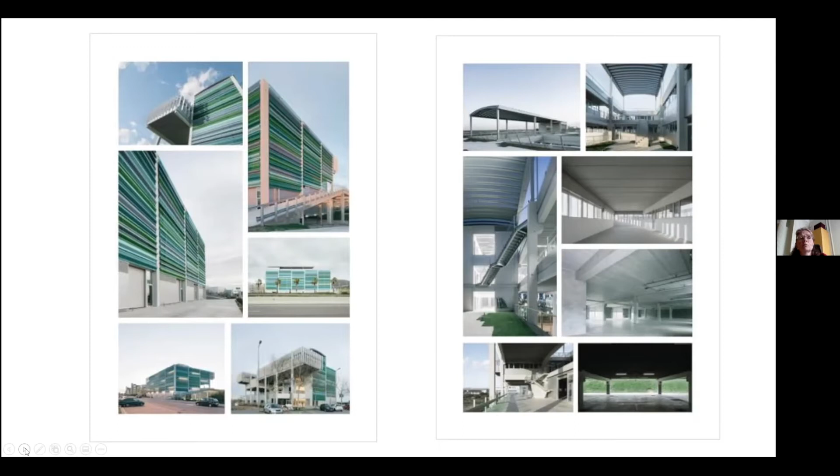Why are we here today talking about circular economy? Simple answer: because most of the present economic systems worldwide are linear. Linear means that waste is part of the process, and the reason we are in this position is because the Industrial Revolution, 2 centuries ago, was linear instead of circular.

The linear economy was pretending to increase production, and the industrial model was designed by engineers. In my own point of view, it is based on 3 points that have caused a lot of trouble for the development of the linear system.

One is the assumption that raw materials were unlimited, and that's not true. Another is that the consumption capacity of people is infinite, and that is not true. And another thing is that the model assumes there are no environmental constraints. This is what we see - that it could not be that way.

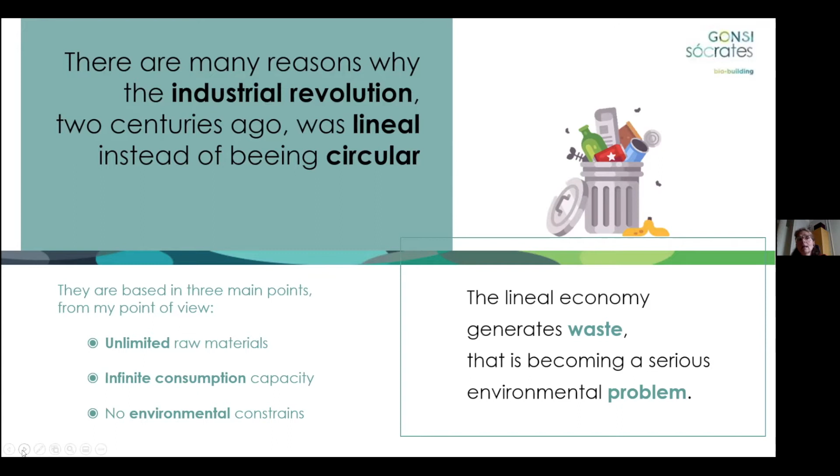Our experience in this building, the bio building Gonsi Socrates. Gonsi is a real estate commercial asset developer and manager. According to our corporate social responsibility, we have built the commercial bio building Socrates in Viladecans, Barcelona, under the circular economy paradigm. What are the key points of this development?

One is the construction system. The construction system was pre-industrialized and pre-manufactured, with pre-industrialized and pre-manufactured solutions assembled on site instead of amalgamated. That's a key point to make the circular process happen.

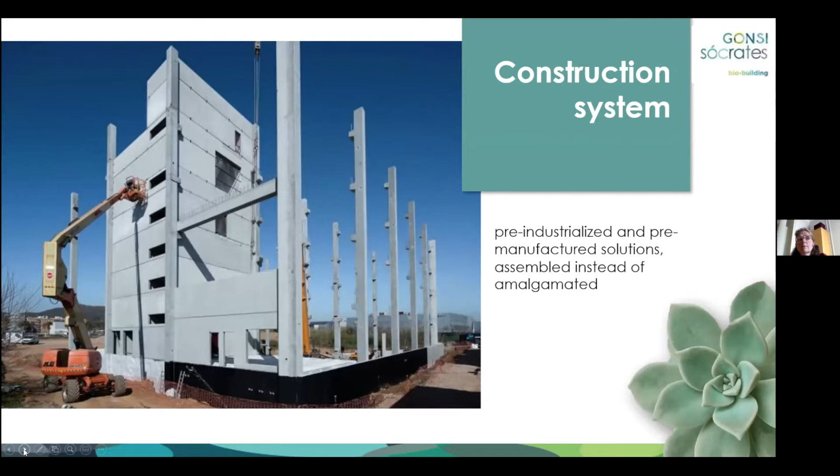Another thing is how we ordered the relationship between persons, between all the integrants of the contract of the work. The relationship between partners has been through an integrated project delivery contract, known as an IPD, between the architect, the constructor, and the developer.

Another thing is that we have been using technology as an ally. I mean, we have done our best with that, because in our sector, from a technological point of view, at least in Spain, it's not at a very high level.

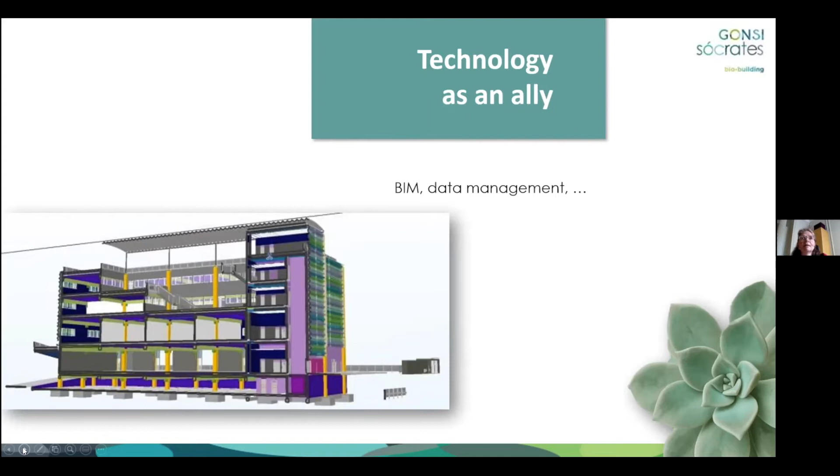Another key point for me is that whenever we planned it, when the architects designed it, and when we decided to build this building, we were always looking at the life cycle of the building. That includes the maintenance period and the construction of the building. This building has a deconstruction planning.

One thing that's framed in the IPD is that we need to manage the talent. So the project has involved talent management, applying, for example, techniques of people management in high performance teams.

After the experience, and when you invited me to this talk, I did a SWOT analysis, trying to share with you the strengths, the weaknesses, the opportunities, and the threats that the experience of building under circular economy criteria has brought.

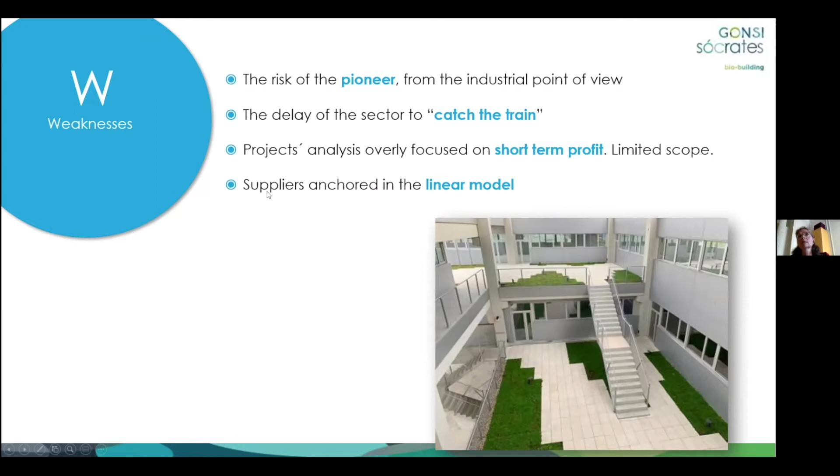And another weakness is that suppliers are still anchored in a linear model.

The opportunities that this new concept brings: building while considering the lifetime of the building could reduce future investments and expenses in the building. An opportunity is to be able to close the economic cycle by capturing value at the demolition or rehabilitation stage. I mean, circular economy, it's an economy, it should be considered from an economic point of view.

Another opportunity could be to develop the sector according to the present. As I've told you before, our sector, at least what I know here in Spain, is a bit stuck in the last century, the 20th century, not the 21st. And that opportunity is an opportunity to make the project more visible.

That's why we are here, talking to you. And the threats - for me, an important threat is how the political system supports and collaborates to accompany this economic revolution, because the circular economy is a revolution from my own point of view.

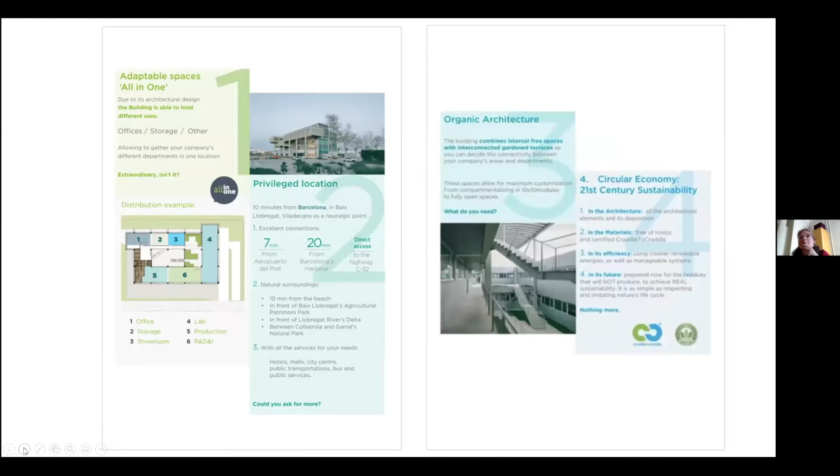This is a bit of a briefing on the characteristics of the building, in the city close to Barcelona, Viladecans, and you can see here a bit how we describe it from a client point of view. Thank you very much for your attention. And I think Ignasi will take over the view.

Thank you, Inmaculada. That was a very powerful message. And I say visibility is so important, isn't it? That's why you're here, that's why I searched for you and found you. Just as a client, could I ask one question of you?

Yes. When you go about selecting your preferred architect, engineer, contractor, how important is circular economy to your business, and to what extent do you require these companies to think circular?

That has been a key point when we built the team, because we share this purpose - it was around the circular economy, and that is not small. Pich Architects has had a tradition of sustainability; we were his clients for a long time. The constructor - this was our first experience with the constructor, but the constructor's strategic vision was also the circular economy. So it was a key point to make it work. In our social responsibility, the company holds the value of sustainability.

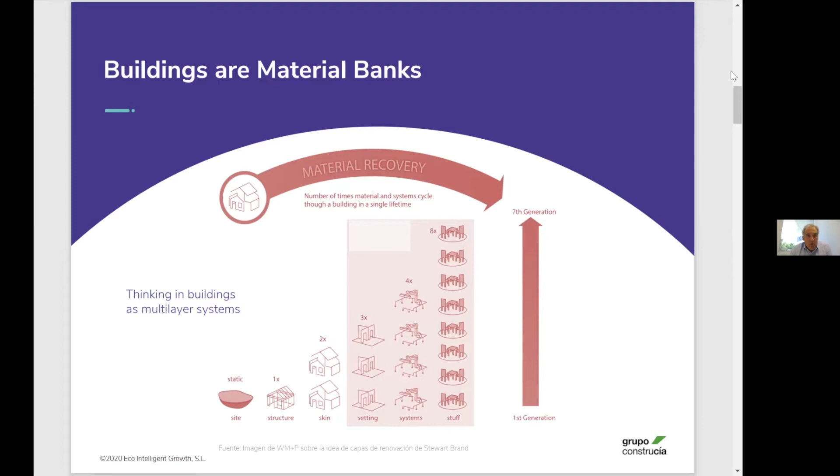Inma has mentioned it already, but we were very much at the ramp up of the circular economy definition. We were supporting the Ellen MacArthur Foundation, indeed supporting Dame Ellen MacArthur at the very beginning when she was visiting us in the Netherlands.

From the very beginning, we said that a circular economy, as Inma just mentioned, is not a sustainability topic, it's more like an economical, socio-economical topic. So I don't consider sustainability a journey, sustainability is a goal. What we need is an enabler to achieve sustainability in any kind of human activities. And me being a biologist by education, we are used to dealing with complex systems. So the built environment is a complex system, but not just because of the technical things.

Just a comment on the chat saying that it's more a cultural challenge than a technical challenge, and I fully agree with that. I think the main challenge for circular economy is cultural, because circular economy is a new relationship framework that has to be built up, and this is what is really challenging about a circular economy.

That's one of the reasons why we started by pushing all the suppliers, most of them, we were pushing all of them, but not all of them took it. But in order to have what we consider at that time probably the first and only way of verifying circularity at product level, which was through the cradle-to-cradle certification program, we started by taking the project and benchmarking the different products and different material selection with the cradle-to-cradle strategy. We developed a number of products. There were some products developed on purpose for this project, and there are now new products being adopted by the manufacturing companies themselves.

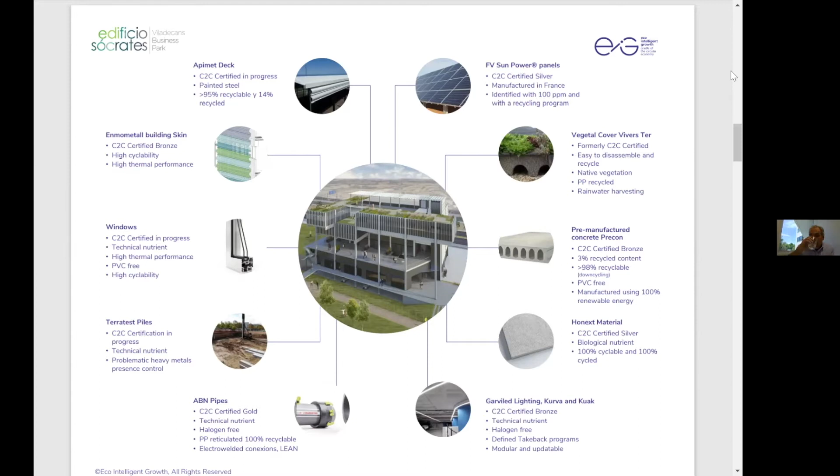The cornerstone of our strategy in circular buildings, in circular real estate, is how we create value through circular building. The main thing about value creation is, okay, what is waste? How do we define waste? We define it quite simply: waste is something that has no value anymore, neither for the human system or the natural system. So one of the reasons why waste exists is because we have a lack of information, whether on the quality and future of the product, or on the asset management of this specific product, material or component.

So we started by developing what we call our manual analogic material passport, which was above 21,600 tons total material management system. That was quite a labor-intensive exercise because we were going down to the component level of every single material. That's why we were claiming material health and safety of the product to be almost 100%, because we were checking product by product, which, by the way, is something that is not scalable.

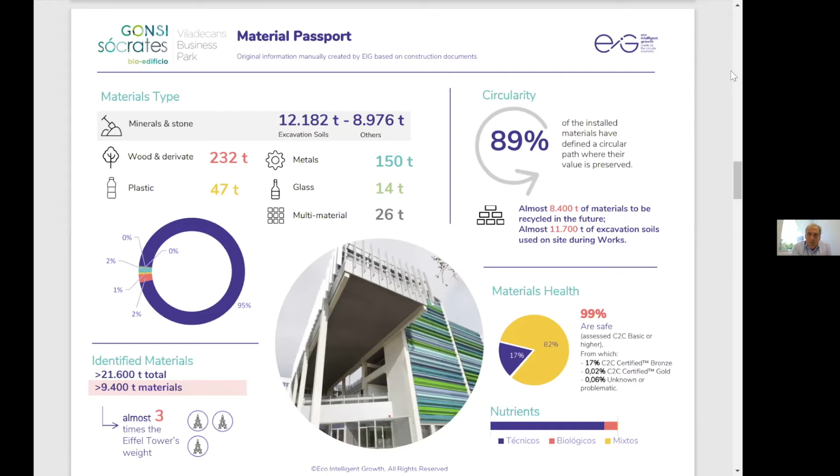The administration is supporting this idea. If you look at Level(s), for instance, it seems to be the new aspirational framework for high sustainability standards within the European community.

We started this project by the time the first draft of Level(s) was released, so we were very much keeping an eye on that. Basically, what we said is that this is a kind of game changer for the built environment, whether it's a new product, new building, or a rehab or fit-out of an existing building or any other built infrastructure—they don't necessarily need to be buildings. It's always the same scheme.

So we need to have an idea, a project. If there's an existing building, what is the status of the existing situation? How can we align the design and the different design teams to get the goals of the project? Then the construction—how can we monitor everything from A to Z? And then the exploitation phase, which is not only about the use of the building, but also the next use of the building itself or what has been embodied in it.

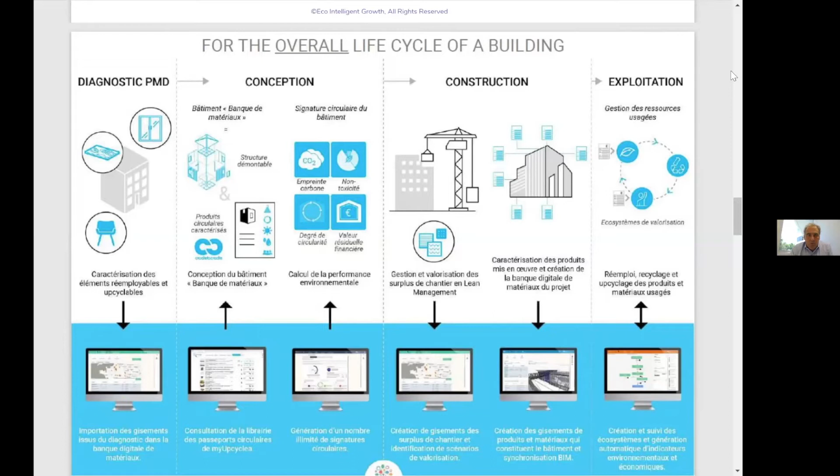That's why we need a digital system. On the blue strip here, you can see we have a collaboration with a French software development company called Upcyclea, and we are co-developing. We started with their software, but now we're adding a lot of new layers. That's why we think digitalization can heavily support this process to transition from linear to circular.

When you look at the circular signature, which is the digital one, one of the lessons learned is that there's little room for any kind of subjective analysis. This is a binary system, it's 1 or 0. So the information and how you upload it into the system is key. This is one of the things we learned in this project.

We did our material passport first, and then when we did our digital passport, we found out we still had a lack of information. For instance, all our plumbing system was PVC-free and cradle-to-cradle certified, but we still had a lack of information on these products.

Why this is important for us is because in order to take circular economy mainstream—and Constructia wants to become at least 80% circular by 2022, probably the highest and most ambitious record in the market—we need a system that is scalable, manageable, doable, and valuable. We need to take it to the next level. That's why we're turning all this into a digital process.

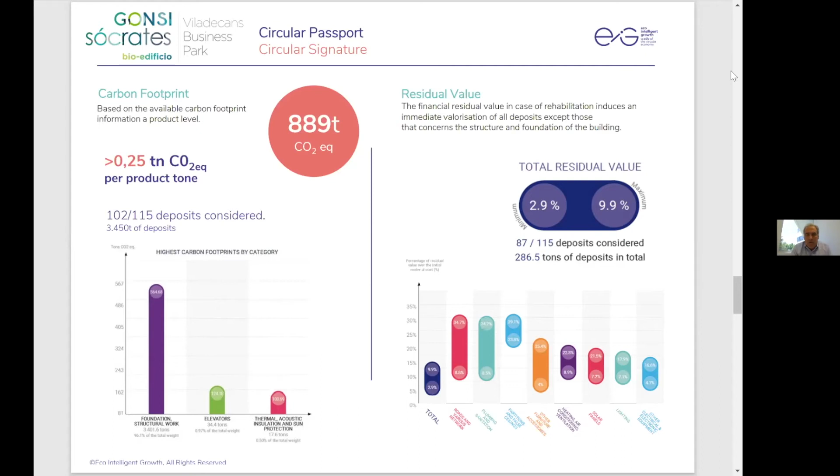And why is data so important? This is because of the gap analysis. We were running this gap analysis for every single attribute, and it gives us information on, for instance, whether manufacturers have enough data in their system, whether they use EPDs or any other kind of information - is the information good enough for product circularity? Well, this is challenging.

A lot of the data created in product specs and material safety data sheets is all based on a linear economy. So that's why we need to ask new questions now, and define new requirements and criteria through product circularity data sheets. The good news is, for instance, the Ministry of Economy of Luxembourg is already releasing a suggestion for a new system for product circularity data sheets that is very much in line with our cradle-to-cradle approach, by the way.

So in the end, what we need is to avoid waste, avoid inefficiencies, design for abundance, and have a regenerative building. It's not just about delivering a building, it's about what the real impact is. If you really want to state that you have a positive impact, which is something very aspirational, by the way...

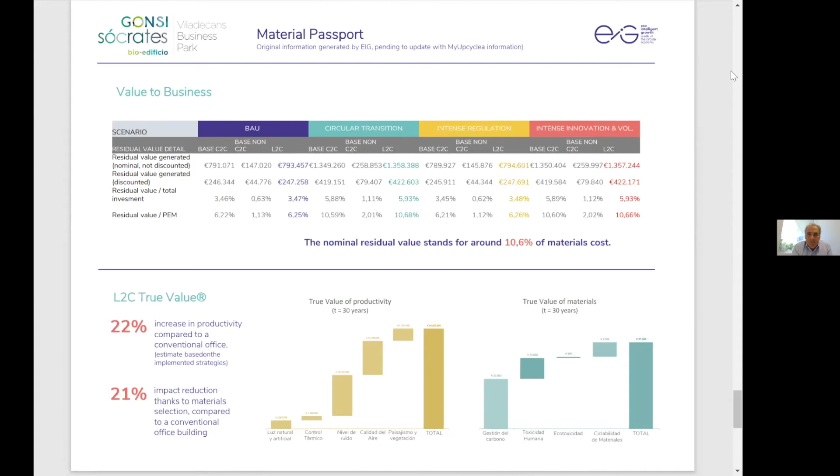I'm learning loads about circular economy. That last piece, that circular economy is not about the loop, is interesting. The big message I got from you, and indeed from Ima, was if we want to transform, there's lots of talk about transformation, digital transformation. It's not about digital transformation, it's a cultural change. We just need to think differently. Because if we don't think differently, we may not be in business in 5 or 10 years' time in this sector. That's how powerful this is.

Yeah, so I hope there are clients here today listening to this message. So many questions, I might take one question for you, if that's okay, from the chat, and then we move on to our final presentation. I suppose it's the most difficult question for you, I don't know if you can answer this one. How did you calculate the carbon footprint of this building?

Well, it's a nice figure there, how did you do it? Yeah, well it was quite simple. We were looking at scope 1 and 2 for product manufacturers. So the criteria was when the information was complete, we were using the data. When the information was not complete or was not reliable, we just put it aside. That's why when we put a product in a specific place, we call it a deposit. That's why we don't have the same amount of deposits when we calculate the carbon footprint compared to when we calculate the material health, because the information on material health and carbon footprint is not as complete. It's not comparable in terms of...

I think it's important that all of us try to use part of our time to develop the conditions to make that change. Not only producing products or projects, but trying to impact on a larger scale. In my case, trying to activate the public sector, the private sector, and the industry, to make the change—one of the key milestones of that change is circularity.

This is why I'm so happy to be here today. In architecture, circular economy is the baseline of the transformation, but it's not the only issue we should focus on. I like to think of it more like Chinese medicine—we should act in several ways, several layers, to improve the way we build and relate to the world in general. If we do it globally, we will speed up this procedure.

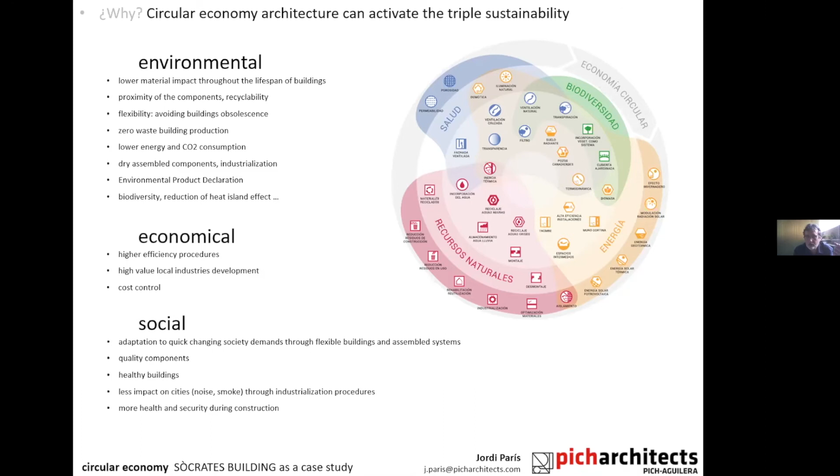Health, of course—if we build reasonably better, our cities will be less impacted by noise and smoke. So things like industrialization are positive also in a social way, including health and security during construction. This is something we should activate ourselves, even if nobody is asking us, because it's not necessarily more expensive, and it works on a global scale.

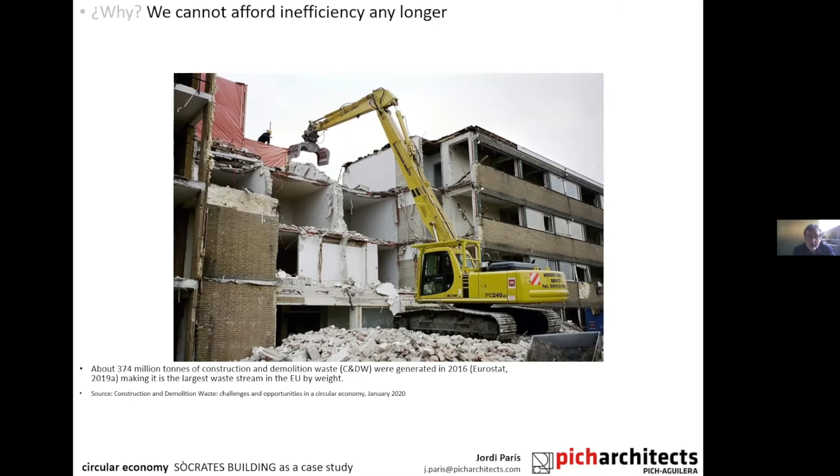I dare to say it's cheapest if we can activate the whole scale of the procedure. We cannot afford to keep doing things like that—so how can we do it?

This is also a multi-level approach through architecture. We must collaborate with several different agents, as already mentioned. We have technology like digital twins, life cycle analysis. We can understand buildings as infrastructure and separate—we'll speak again about the layers.

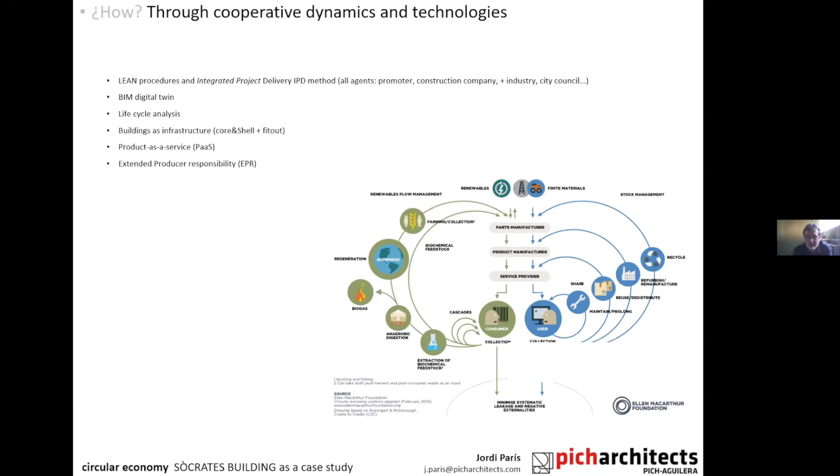Understand the product as a service. Understand how we change the way we relate to buildings and ownership today—the extended producer responsibility. So these design strategies are there; we can focus on them. We must keep working deep into that, because this is really useful not only for economical circularity, but for the users finally.

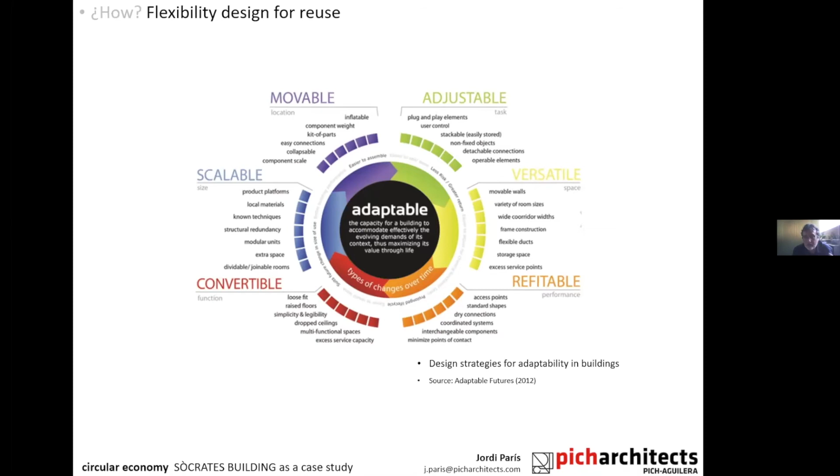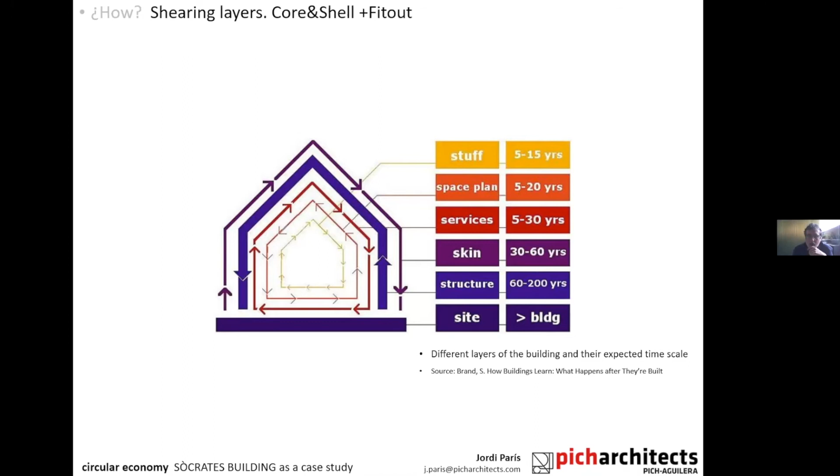These are the several layers already mentioned before. A building is not a thing that you build and dismantle, but an organism. If you understand a building as an organism that relates to several components with their own rhythms and specifications, we should design every line of this structure relating to the needs and potential of every part of the building.

Elements should be attached visibly, so a building is a device that can express how it is built. You should be able to learn about construction when you visit a building. If we go through a forest, we learn about nature—why can't we learn about buildings when we visit one and see how things are composed and how they work?

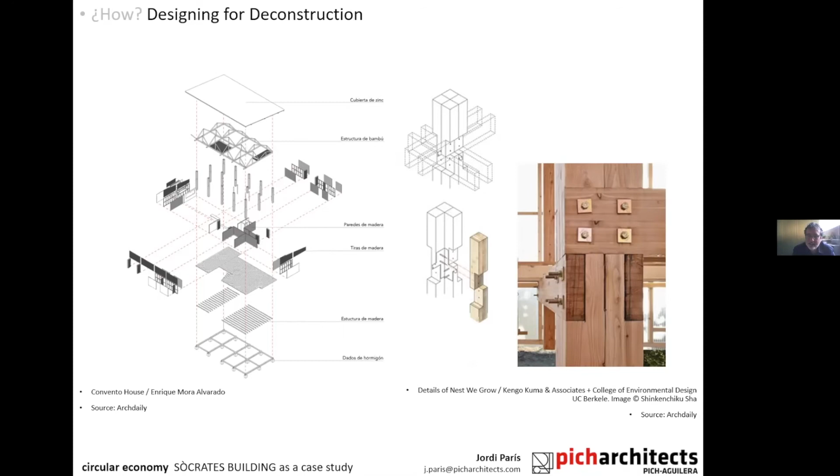This is a basis of 20th century architecture and 19th century engineering—they got there quicker. We must produce buildings that enlighten people on how things work, how nature works, and how technology and human design works. This is also circularity.

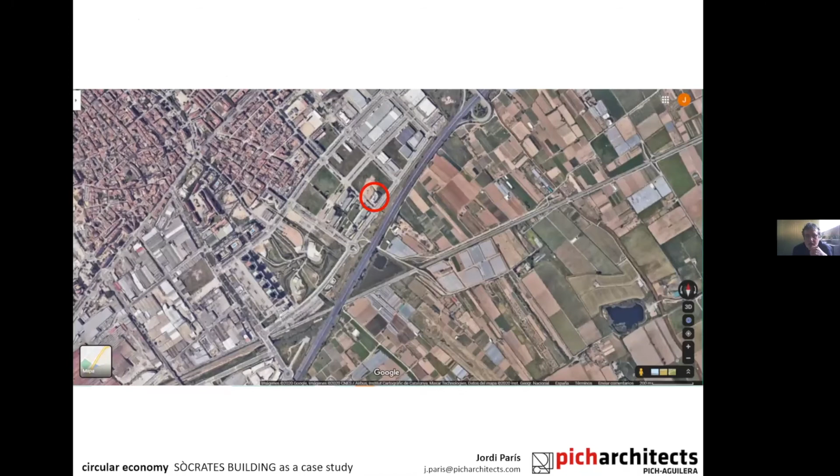So the heart of the building is a void, shared and illuminating the interior, making spaces. These spaces allow meeting, networking, and relating to one another—this interchange of knowledge and human experience is also part of the architecture. Again, the building is not an object; it's a device that enables life to enter the spaces.

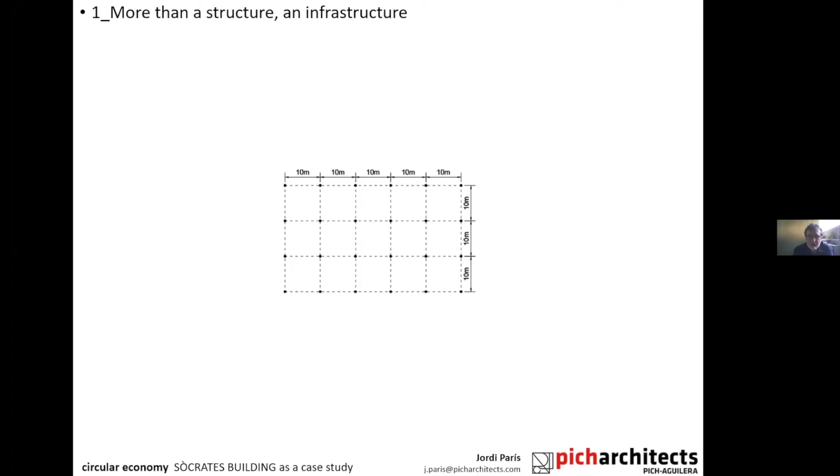Flexibility: the building is on a grid of 10 meters, with few pillars, giving maximal flexibility. So in the future, anyone wanting to change the fit-out will find flexible spaces, and they can make changes without surprises—without finding installations or pillars in the middle. It's really an infrastructure prepared for whatever happens in the future.

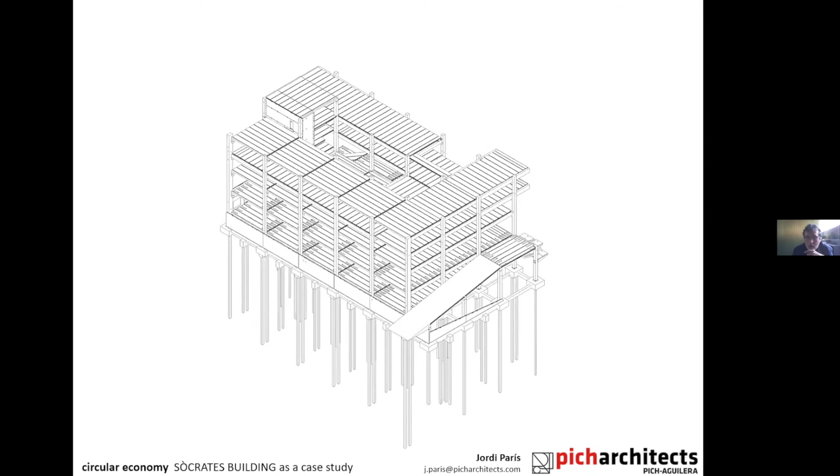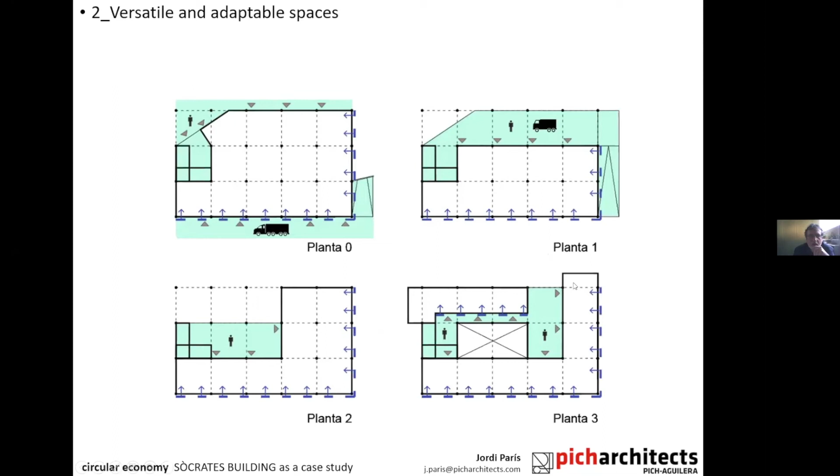This grid of 10 by 10 meters is everywhere—the pillars and beams are always the same. In terms of flexibility, there's also the possibility of going up one level with heavy vehicles, so there are two ground floor levels, giving flexibility for the building's purpose as 4.0 industry. After that, there are more office-type spaces not accessible by these vehicles.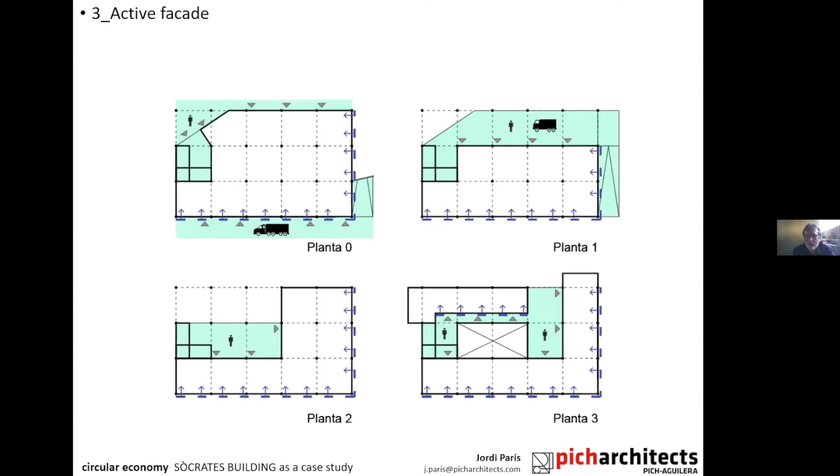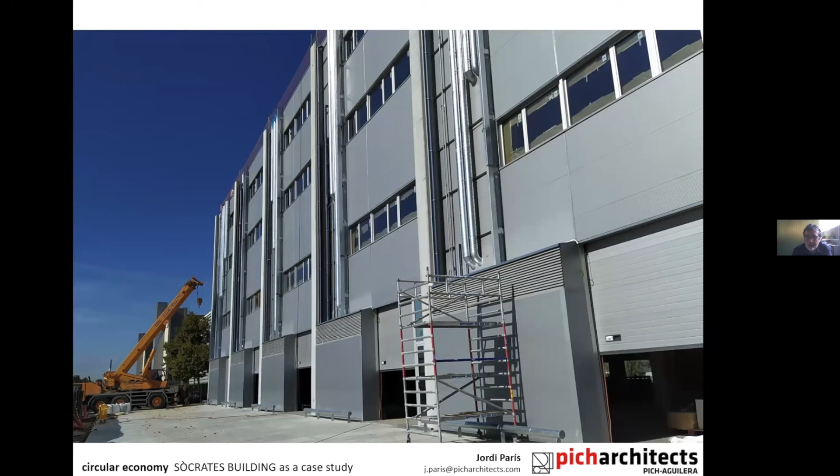This versatility—spaces with natural light protected but present everywhere—relates to the core, the central void of the building. The facade is an active element with installations that protect from solar radiation while letting the view through. This is a micro-perforated screen that protects and lets the view out perfectly from the inside.

So, multi-purpose things achieved with a single element—this is another thing we should pursue: build less, not only less materials but fewer components. Current technology allows systems that serve multiple purposes. So if we want to protect, hide, and let the view out, we normally use three things—maybe a simple, cheap thing can perform this triple function.

Or, the structure with its massivity might give the mass needed for thermal comfort, so maybe we don't need a false ceiling that is useless. We should ask ourselves before deciding to put something in our building whether it's really the best solution, or whether there's a simpler one that brings more potential.

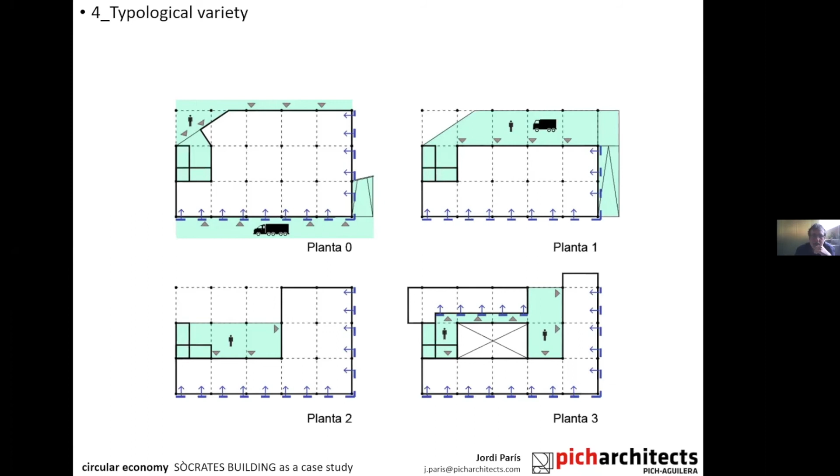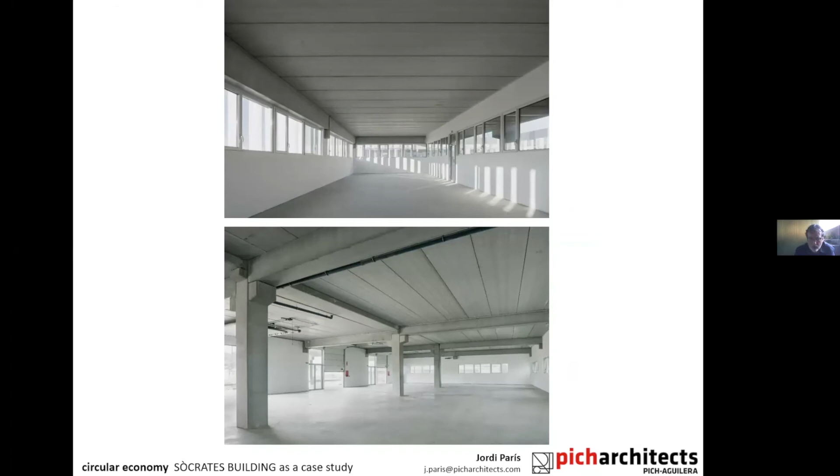It's exterior, protected from the rain, but with a view to the street and the park below from this space. So this is a bit the heart of the building, which brings light in and brings sociability.

There are several terraces, and of course the top terrace, the roof. Here a community can be, and community can be from different companies, which is even better. So different people can meet and can interchange. So architecture is bringing life into spaces. It's not just building.

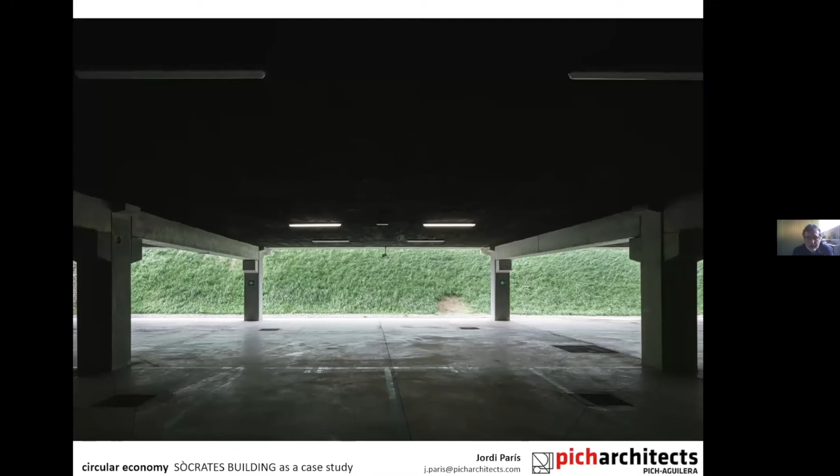A parking lot. Why do we need to close it and ventilate? Well, it's underground, of course, but it can have a natural ventilation and illumination.

The building as an assembly of components. So here there was no waste document for the city council, because city councils here ask for a paper when you have to pay some money to make sure all waste will go to the deposit, etc. We did not need to do that.

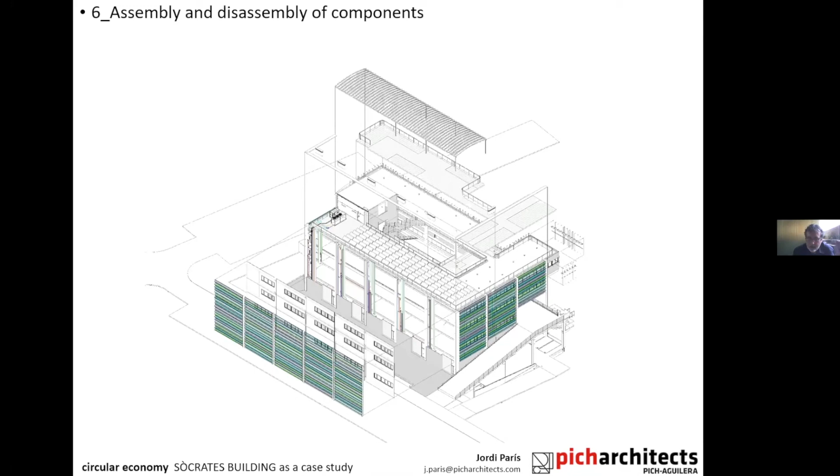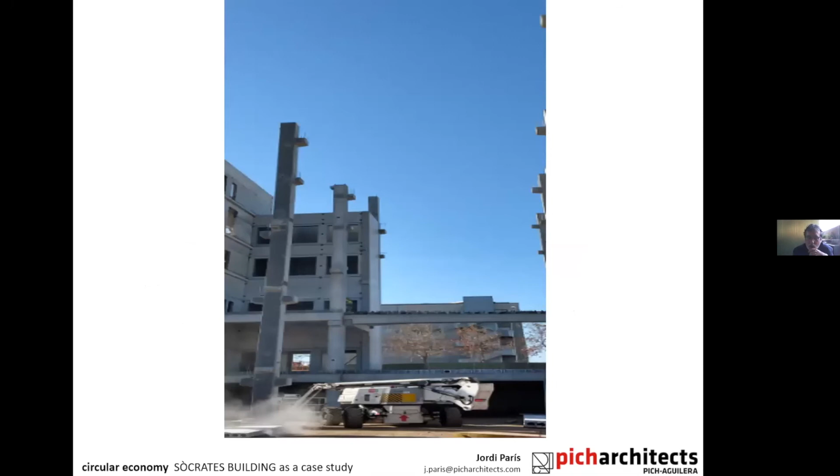Every component was made with good conditions elsewhere within the factory, and here it was assembled without generating waste on the office or the site.

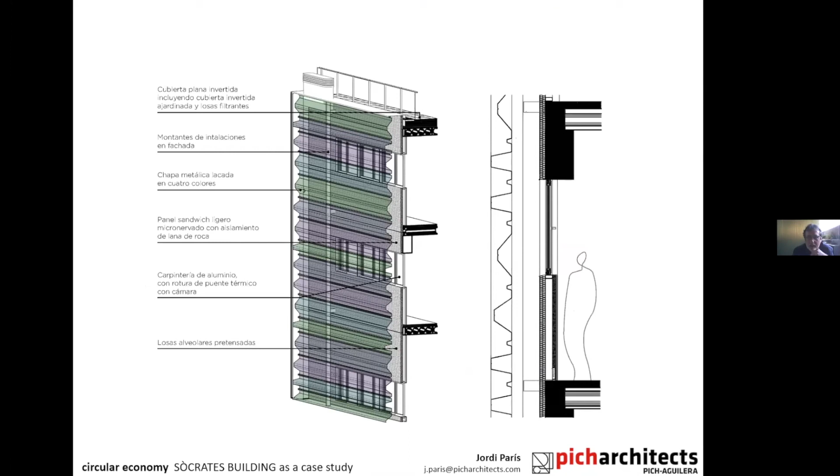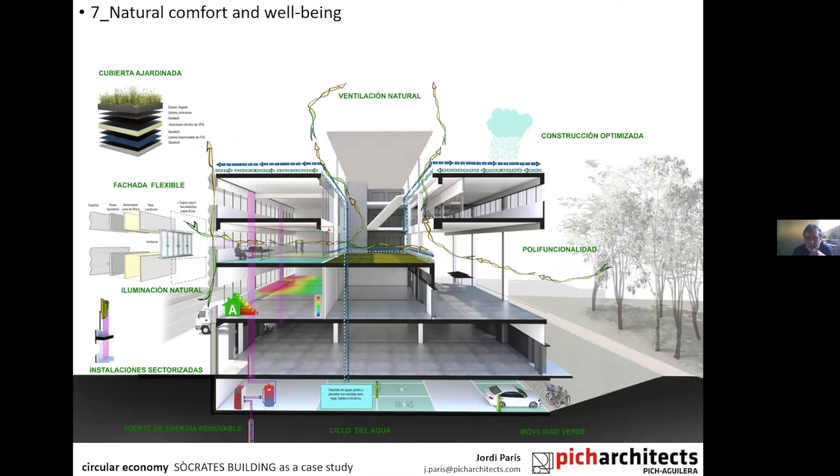Several technology systems that can help, and there are systems that have guarantees, etc. This is also important.

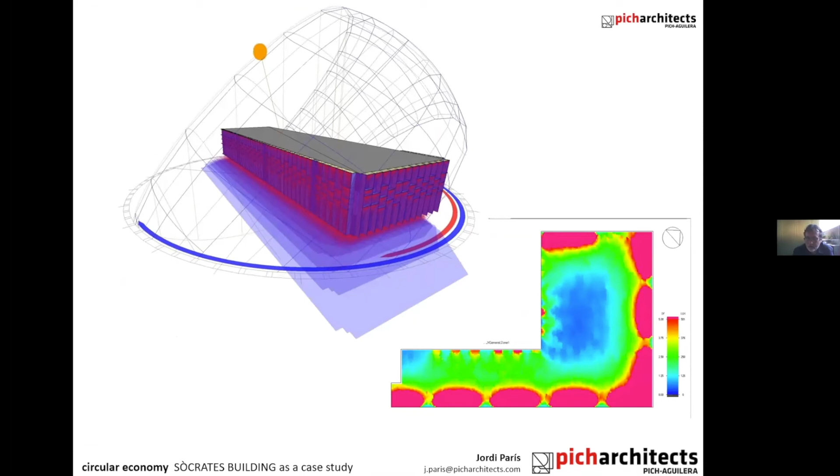And of course there were calculations about natural light improvement, and design is not something that at the end of it we calculate how it works, but it's a constant procedure where calculation and design go again and again in loops to get the best solution.

This goes together with digital twin dynamics and data, and working with data, not with intuition. This is also important. Intuition is cool, but we need to turn this intuition into something that can be calculated before the construction and before the development of the next phase of the project.

So this 4 kilo per square meter of waste generated on site is ridiculous. So it's... and the waste revalued is almost 100%.

It's easier if we used a few components which add value, real value, instead of the traditional way of doing things, like there were 5,000 systems and components and one brick here, one brick there, and distances. So it's better to focus and to work better.

So it's like Japanese food. High quality components, and you can see them, you can see all the components, you can understand how the sushi is made, or etc. It's not like a soup that you don't know what is there.

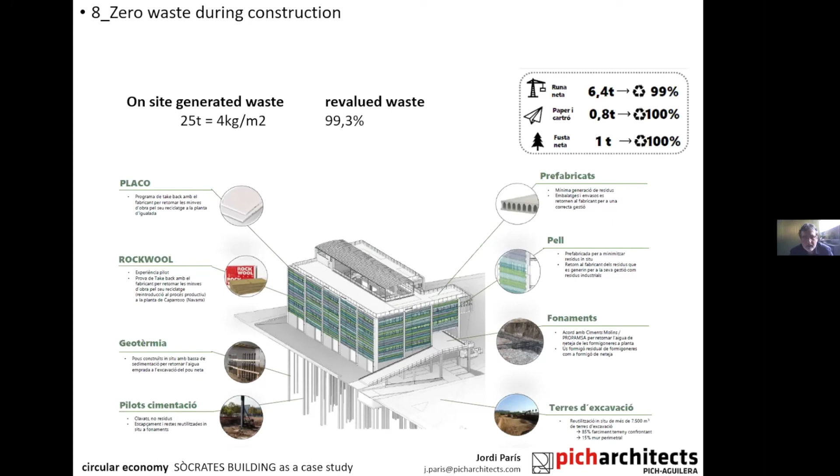Light building, material passport, certification, etc. And here just a couple of pictures of other two projects, in Viladecans too, really close to the building. We are doing the project of a business center that already exists.

It has around 30,000 square meters. They asked us to double this surface with the new model of office and terraces, and that we saw in Socrates building.

Here we'll let a park on the lower level, and offices will only be on top, like the shades that produce to the park. So it's parking, a public park, and offices are 100% over the park. This is the whole of it.

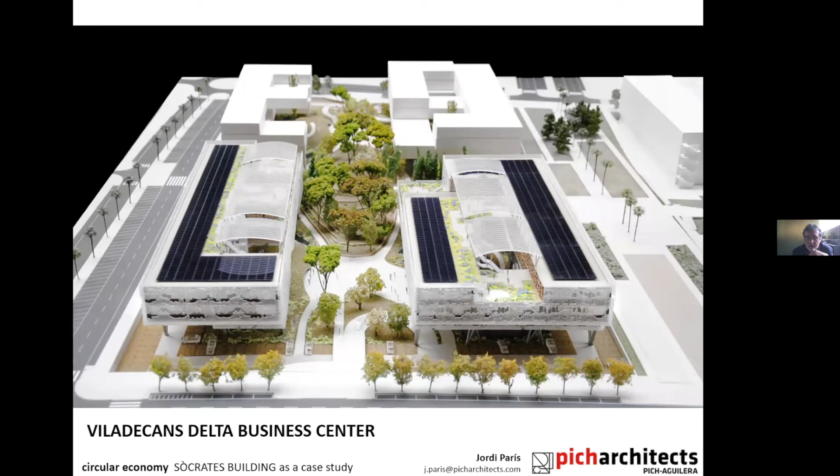Now there is a ground that is lower from the streets, and we will keep this space to open it to the city and to the people. And the buildings will all again be like these terraces and circulation that illuminate and connect the interior working spaces. And changing the type of buildings.

Here's a project about residential, with an open source industrial system. So it's not a system that we designed, but any company can do it, even if it's steel or wood or concrete, it's compatible with that.

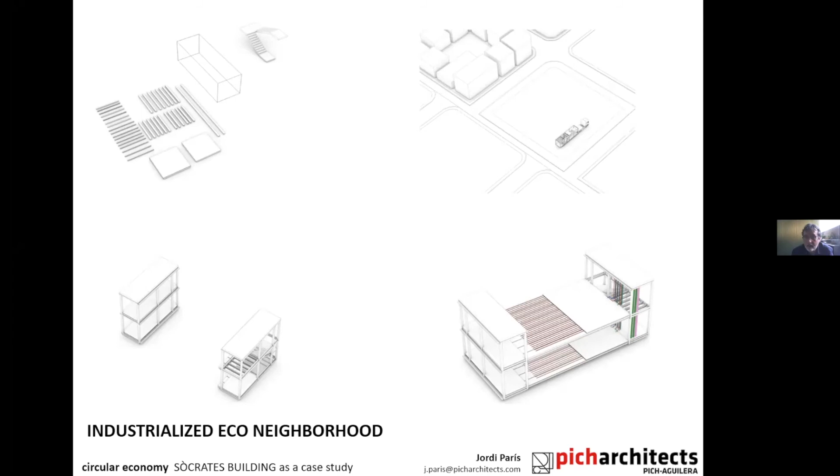There are simple components that can be assembled inside and that have large spans, structural spans, and they can provide multiple textures and typologies and facade systems, etc.

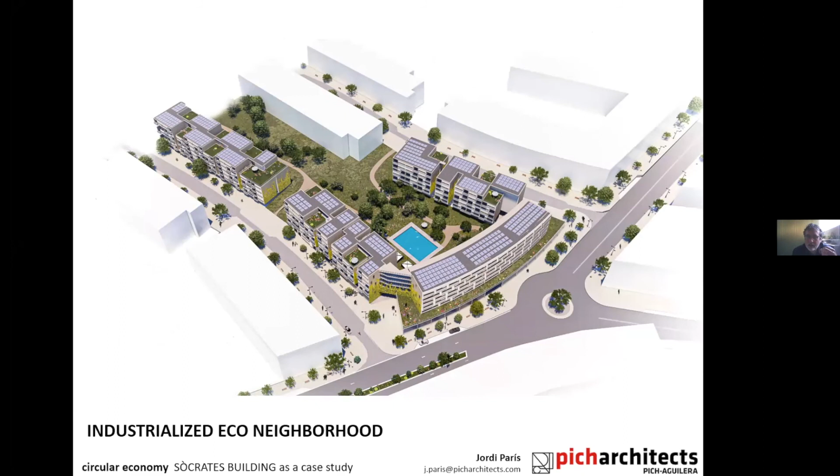With this, so with just a few structural elements and components, we can guarantee what for urban purposes is very important, so that these dynamics don't turn into a Soviet Union architecture type.

So we should try to be more efficient, but not to build things more repetitive and simple, but to turn complexity and flexibility through economic dynamics into our cities. And this is a bit the aim of our work.

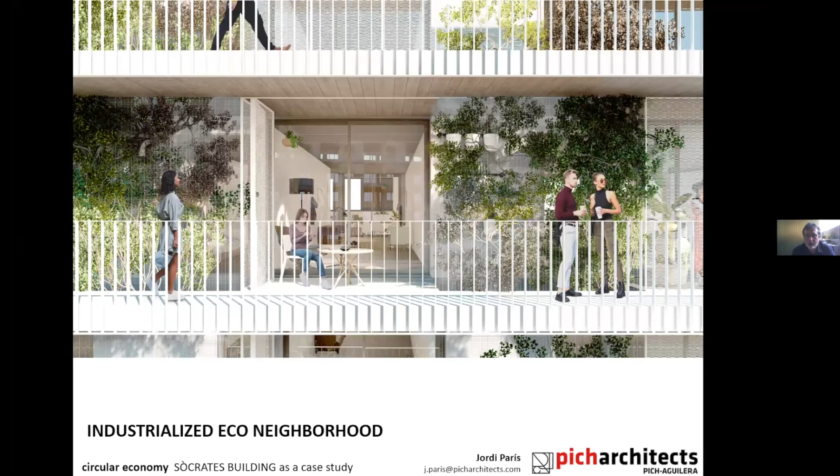Thank you, Jordi. It was a very excellent presentation, and that message at the end was very interesting. I know we've had a comment in the chat about welcoming modularization, industrialization, and we don't want that tower block Soviet feel to our city landscape.

And so it's using the kind of benefits of industrialization, repeatability, flexibility, and incorporating that. We're going to hear more of that, I think, later in the year when we finish with our cities message.

So thank you so much. You must share your diet with me. You have this special diet, yeah? Yeah, I've been sitting down too much at my computer, and had difficulty putting my jacket on this afternoon. But anyway, so I need to watch myself and watch my diet.

So really, it's interesting, you touched there on digital twins, but there was very little mention today about BIM. I'm assuming the BIM is in the background supporting the design process. Yes, currently we almost only work through BIM, but BIM only is not the answer.